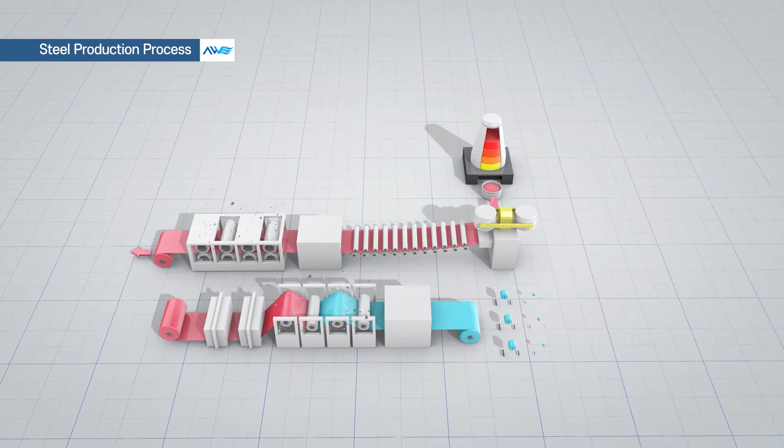Currently, the sites of many steel companies have been concerned about various issues such as productivity, quality, cost, environmental regulations, and worker safety and health for a long time.

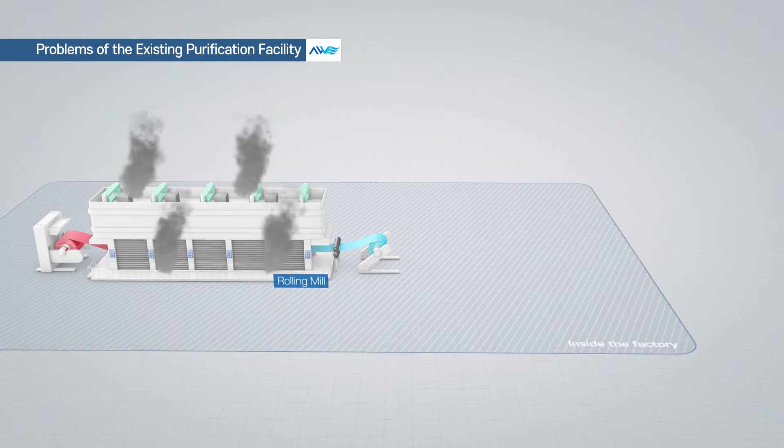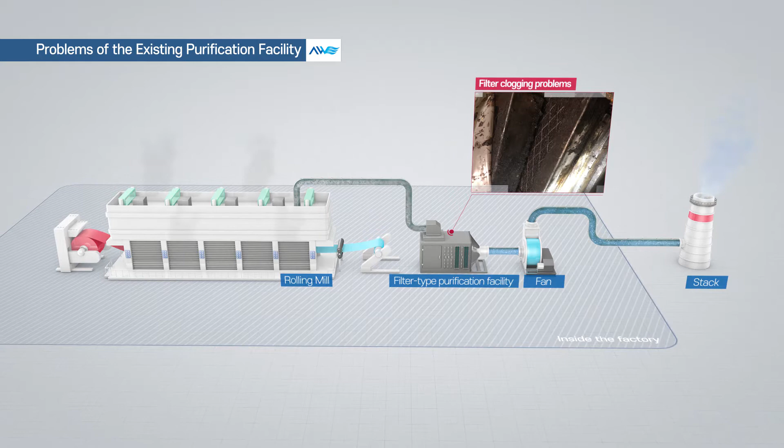Due to the nature of the TCM process, various substances such as fume and odor are generated. If they are not properly controlled, many problems including product defect, equipment failure, productivity lowering, working environment pollution, and violation of environmental regulations will occur.

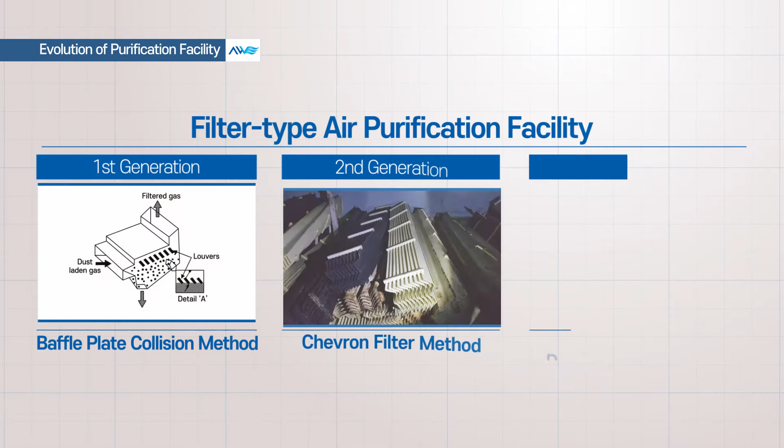Although the industry has been using first to third generation filter type air purification facilities for many decades, the problems have not yet been completely solved. In addition, the need for a new type of purification facility is gradually increasing due to stricter environmental regulations by country.

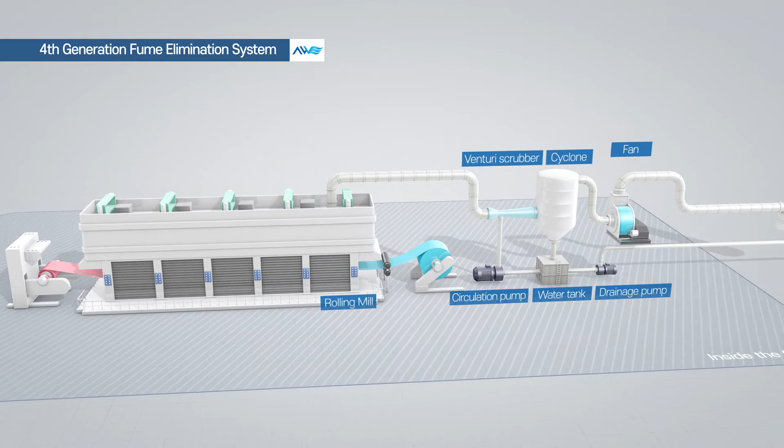After considering these problems for many years, ALLSWELL developed the world's first fourth-generation filter-less air purification system that reflects its unique airflow control technology.

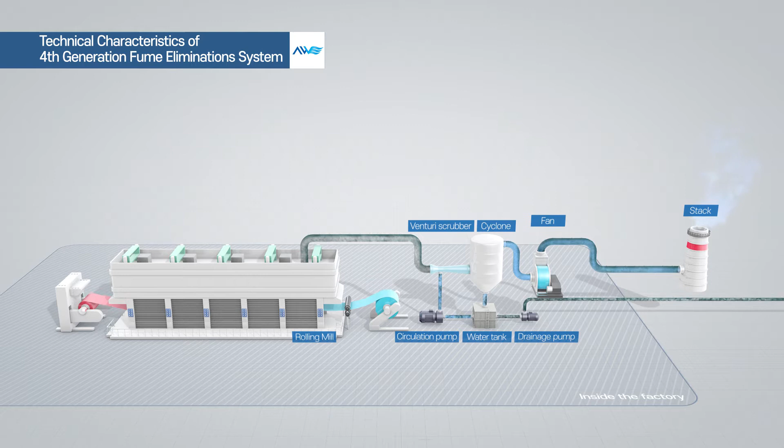The fourth-generation purification method carries out a customized engineering design based on understanding and accurate diagnosis of the entire process, from the manufacturing facility to the last section where the purified material is discharged, and determines the specifications of the final purification facility.

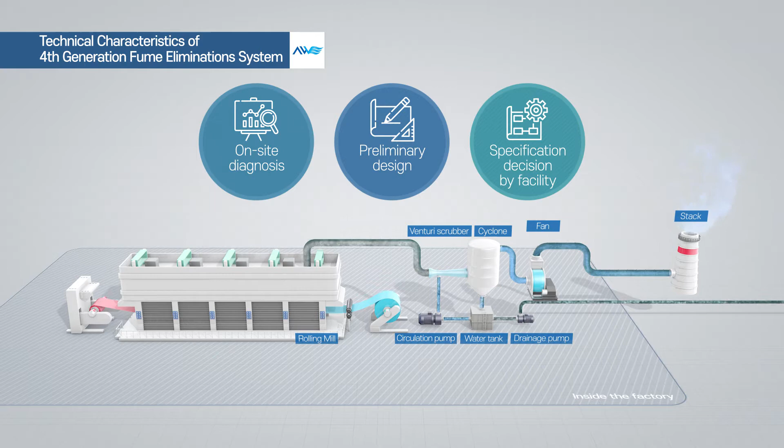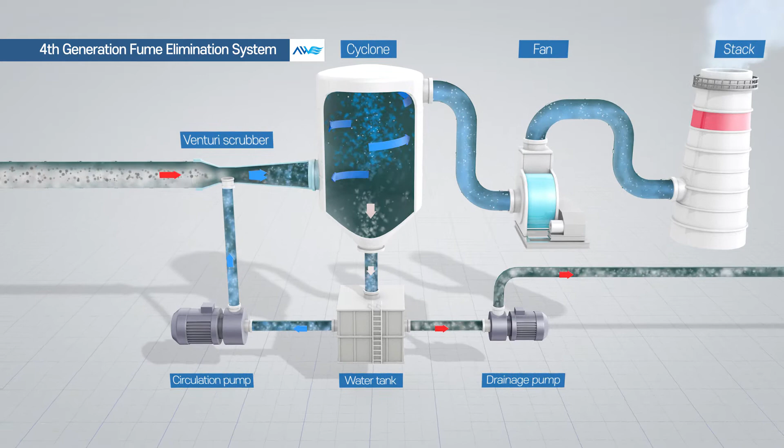The principle of WFLESS is that the pollutant introduced into the duct meets the water powerfully injected by the venturi scrubber. It is discharged downward by centrifugal force and gravity in the cyclone, and the clean air is discharged outward.

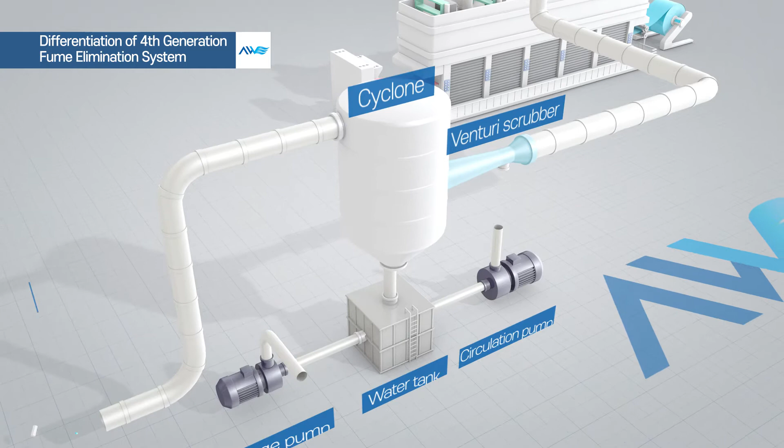The biggest distinction of ALLSWELL's airflow control technology is that the set values designed and applied after an accurate diagnosis remain stable without change over time and have an outstanding emissions purification effect.

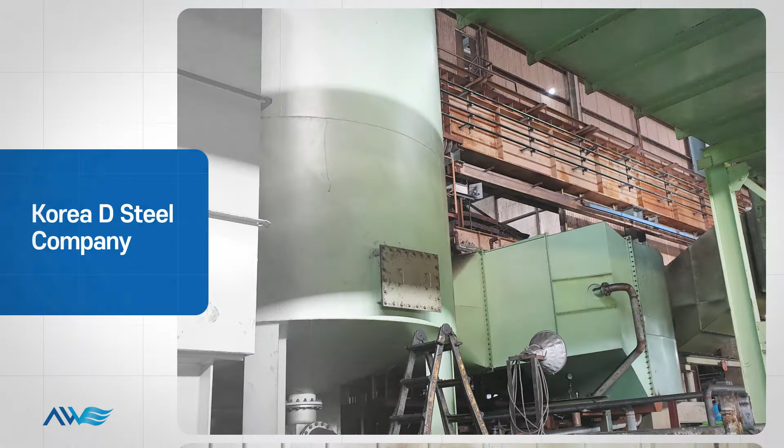WFLESS has been applied to the TCM processes of domestic steel companies for the first time in the world, and based on these cases, it has also been applied to China's Baoshan Iron and Steel Co.

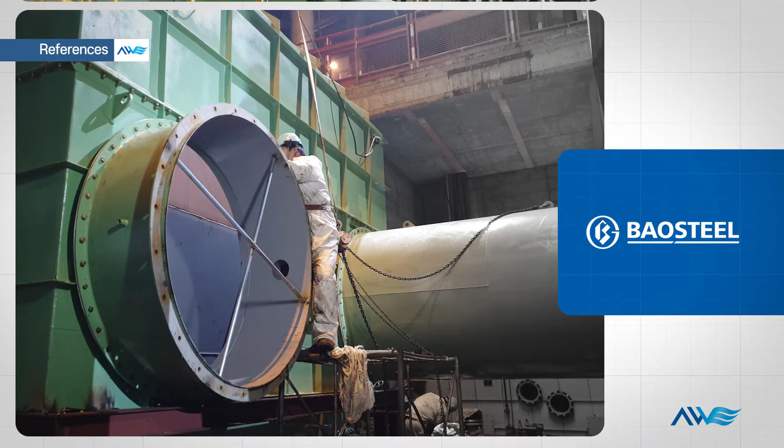In particular, the contract with Baoshan Iron and Steel Co. was concluded through technical competitions with global companies and verifications.

There is no facility contamination in the cyclone and ducts, even after 4 years from the initial installation, so that no additional cost occurs for maintenance and management.

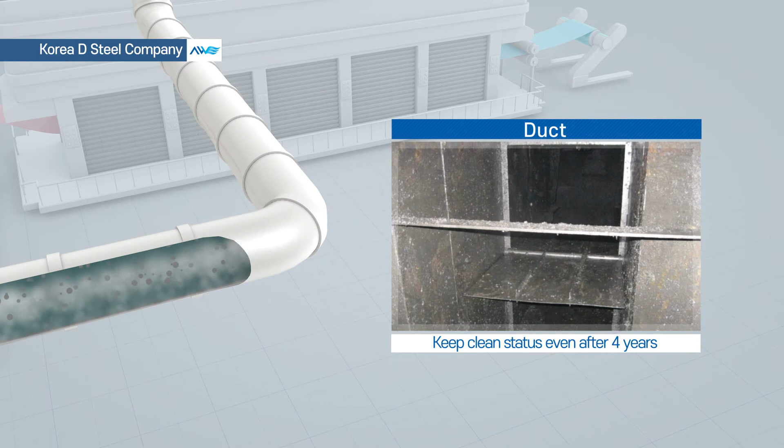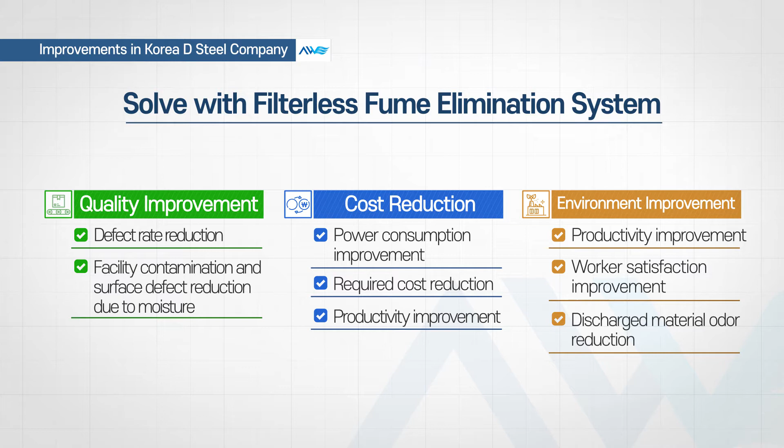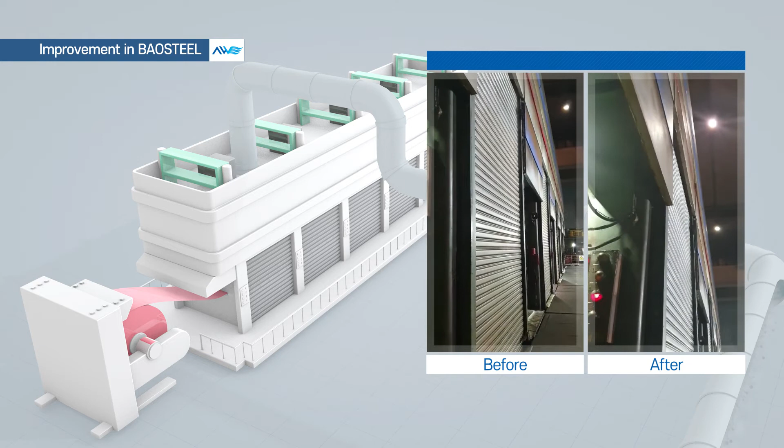Baoshan Iron and Steel Co. satisfied all 7 warranty items through an accurate diagnosis and design, including improving the workplace environment and reducing pollutants to meet the environmental regulations strengthened by the Chinese government.

ALLSWELL's airflow control optimization process consists of 4 steps and 6 processes. This process analyzes customers' requirements and problems precisely through ALLSWELL's differentiated space diagnosis method and presents the optimum air solution through the customized design for performance assurance.

ALLSWELL provides the best air technology solutions for productivity, economic feasibility, environment, safety, and sustainable development of companies.

We are making safe spaces to breathe. ALLSWELL.